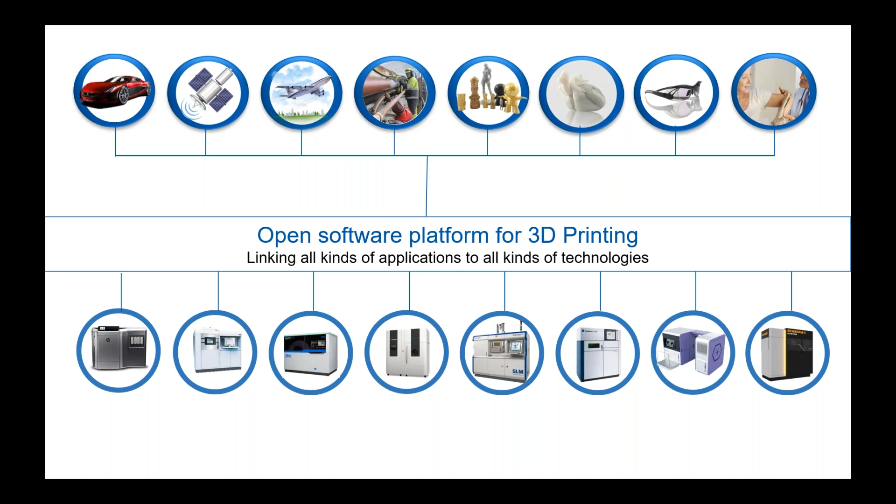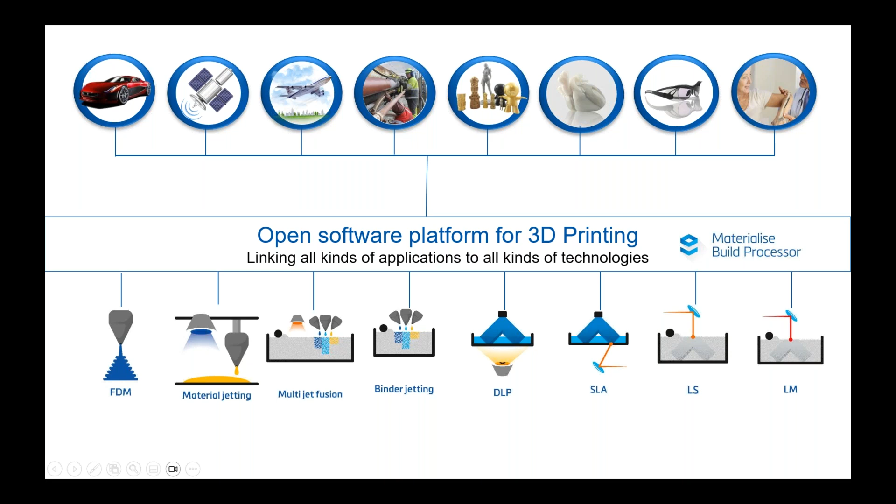So one of the goals of Materialise is our scope of handling every single additive manufacturing technology that there is. Some of the more obscure technologies we don't support as rigorously as the ones listed on the screen right here. And the ones we'll be talking about mostly today are laser sintering and DLP. A lot of these technologies shown on the screen have embedded functions inside of our softwares, but we also have a lot of additional modules that really help these specific technologies as well.

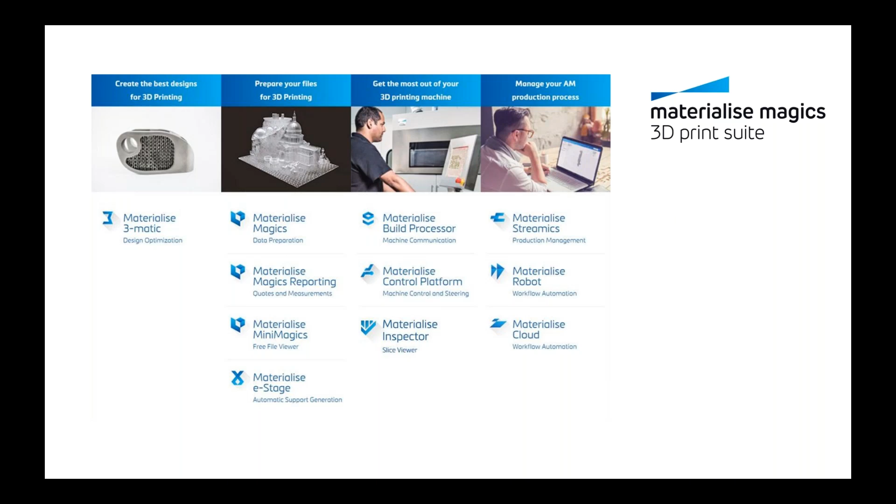So the main scope of Materialise, and one of our main goals, is to be the complete end-to-end workflow of your additive manufacturing process. It can start off with Materialise 3-matic. After you get your parts designed in your CAD program, you can put it into 3-matic. 3-matic isn't necessarily a CAD program, but it is a design optimization software, where you can make some pretty powerful edits to a part and things that really pertain to the additive manufacturing space. And if you've heard of Materialise, you probably think of Materialise Magics.

This is our most popular software. Our first iteration of Magics was developed in 1994, I believe. Magics 1 came out around then, and currently we're on Magics 27. So yeah, this is our bread and butter software.

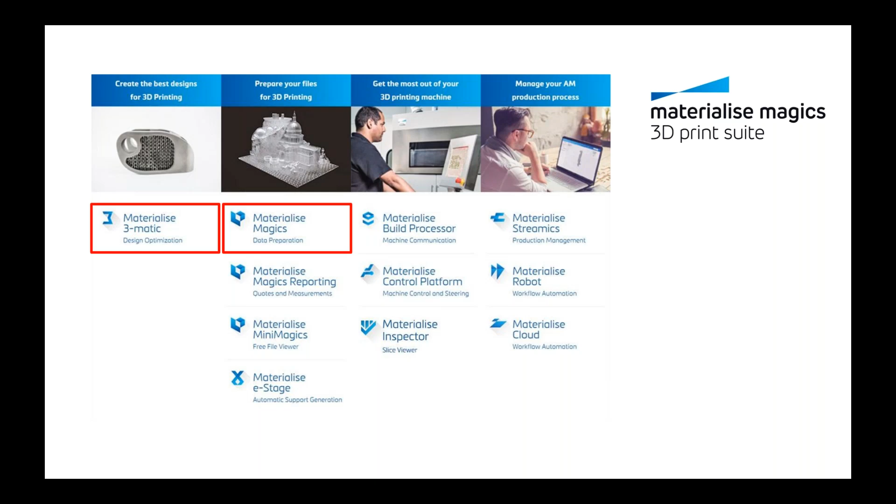You may have also heard of Materialise e-Stage. This is an automatic support generation software. We have a good use case for that in SLA processes and laser powder bed fusion for metal processes as well. And what I'll also be talking about today is the Materialise build processor. The build processor is just increased machine communication from software to machine, therefore increasing communication between person and machine.

And then on the right-hand side, you see Materialise Streamics, Robot, and Cloud. We also have our most comprehensive version of all of these put together, which is CO-AM. CO-AM will manage your entire 3D printing process. So when you receive your part from your customer, if you're a service bureau, or when you get your part designed, you can quote your part, see where your part is throughout your workflow, manage all your machines, have everything scheduled, and be able to keep track of your parts as best as possible, just to make sure everything is accounted for.

And on top of that, it is a cloud-based software, and this software can be held on your own private cloud or Materialise's cloud as well.

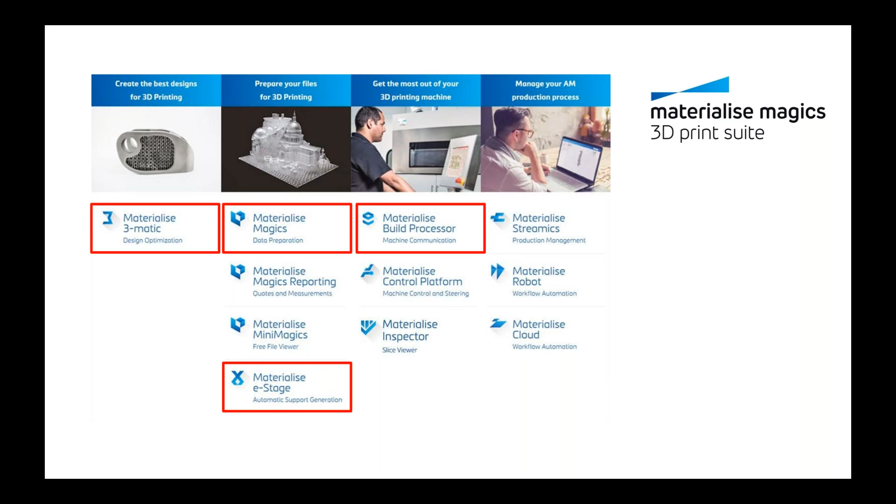So starting off with 3-matic. As I mentioned before, 3-matic is a design optimization software. There are modules within 3-matic, but today I'm just going to be talking about the base module. The base module of 3-matic has the Lattice module and the texturing module.

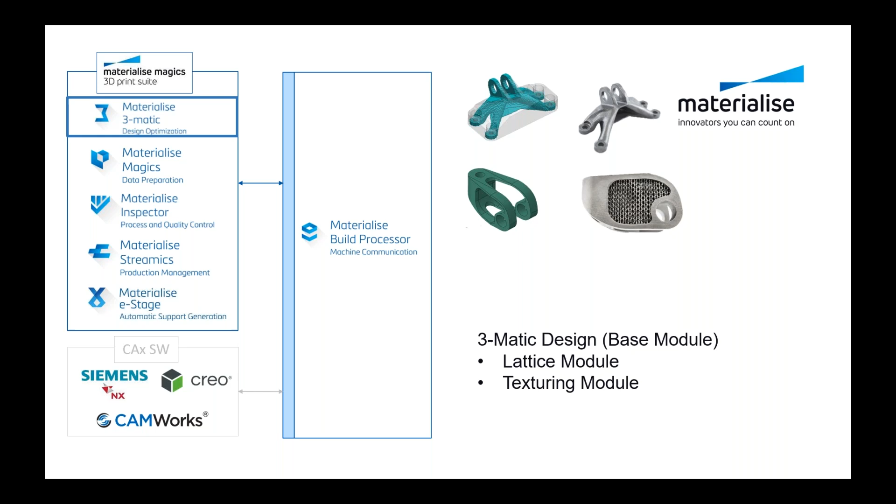So lattices, what are they used for? I'm sure a lot of you guys are really familiar with lattices and their use cases, and maybe some of you have deployed lattices yourself for any of these functions. So we will just roughly go through them.

Regularity of lattice structures provides great controllability. Properties of these porous structures can be fine-tuned to a particular functionality and performance. On the left-hand side, this is what we see the majority of users use lattice structures for within additive manufacturing, and even outside of it, for general use cases - really great for lightweighting structures.

Materialise has a really big hand in the medical field - things like hip replacements, shoulder replacements, cranial implants, knee implants, things along those lines. Lattice structures come in handy a lot, and I'll talk a little bit about that down the road.

There's also vibration control, things involving packaging like shock absorption, everything involving heat, especially heat exchanging, thermal insulation, and acting as a heat sink. It can also aid in increasing buoyancy, aiding in filtration, acoustic absorption, hinges, and support structures to infill in the additive manufacturing process.

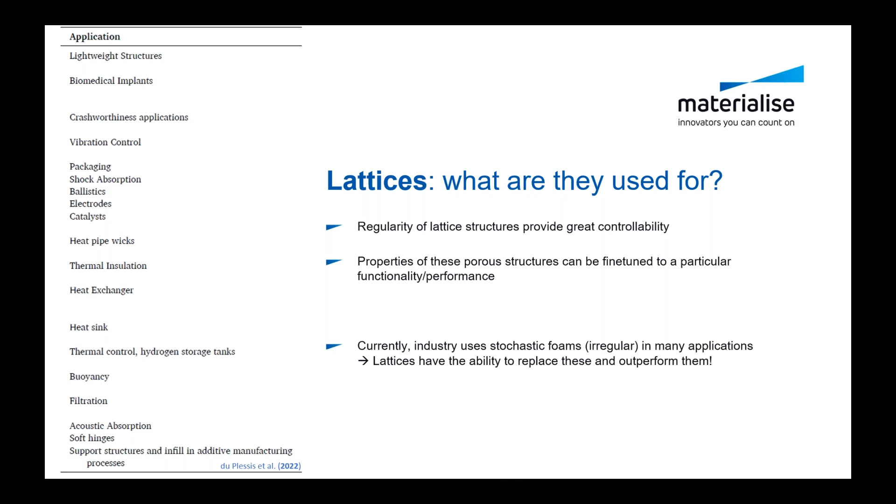You can make these change in size by using the uniform or user-based, porosity-based, linear gradient, texture and image-based, or my favorite, FEA-based methods.

The FEA-based method is really cool because you can actually import your FEA results into 3matic, and 3matic will take those results and then develop its own lattice structure and its own thicknesses to conform to your results, just to make sure that your lattice structure keeps its structural integrity and does what the FEA results outputted.

Another really cool thing about 3matic is you can design your own unit cells for the lattice structure. This is a really intuitive method of making your lattice structure, and just allows for greater customization when creating your lattice structure.

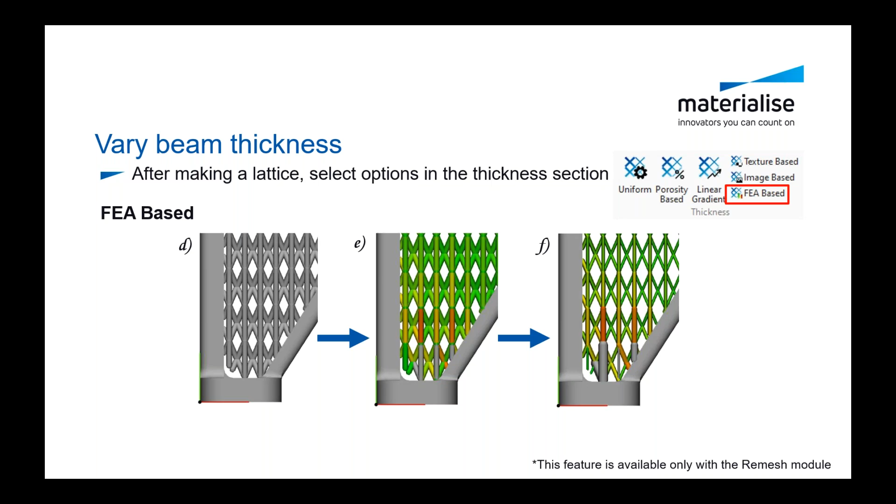The way that 3matic will place your lattice structure onto your part is through UV-based conformal mapping. So you can put it either on one surface or between two surfaces.

An application for the one-surface method is to add texture to the part that will promote bone growth on an implant. Earlier I talked about our involvement in the medical field and how we'll use the lattice structure in hip implants so that your bone will actually grow into the non-toxic hip implant, and it will basically become part of your hip, which is crazy to me, but super cool that your body will do that.

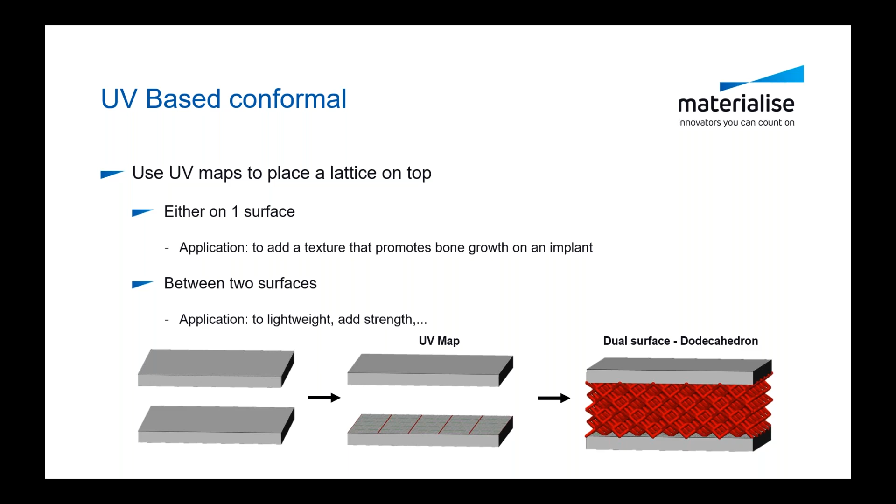And you can also put them between two surfaces. Again, as we talked about before, this can be used for lightweighting, adding strength, aiding in heat dissipation, acting as a heat exchanger, etc.

This is a case study that we did with one of our customers. They are in the aerospace field, and how they use the lattice structure is they put the lattice structure inside of their airplane wings. And this did a few things.

It not only made the airplane wing lighter by replacing the layered material with unit cells and channels, but it also helped in the de-icing process by taking the hot air from the engine compressor and dispersing it throughout the wing, aiding in the de-icing process.

So the flaps that some of these airplanes have when de-icing have to work a lot less, therefore working much more efficiently during the de-icing process itself.

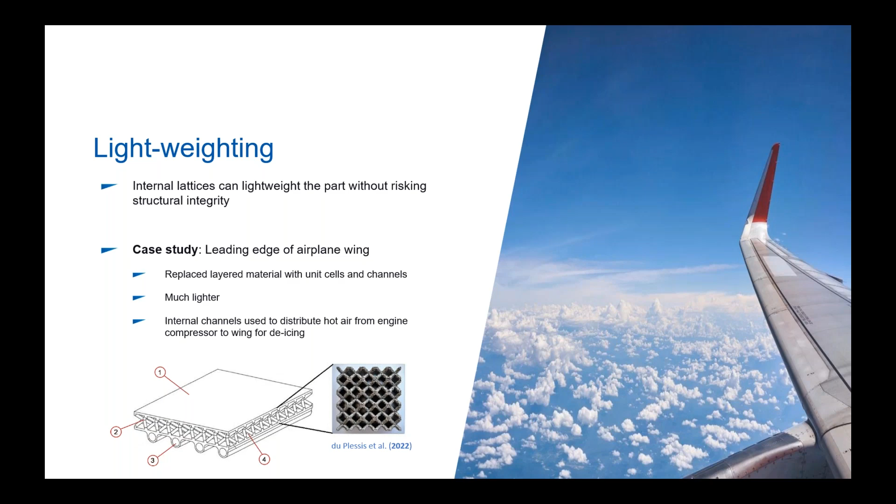And now texturing. So again, very similar to latticing, I'm sure a lot of you guys are really familiar with texturing and maybe the use cases. But I'll just go over briefly what some of the cases are that we see.

Aesthetic textures - you can add some personalization, whether that be for personal or company use. Surface decoration with organic or design patterns. You can also add some organic effect - this can be useful if you're in the medical field, or if you want to slightly change the texture of the part just to make it more useful in your use case. It can also have a blurred layering effect of the 3D printing.

Functional textures. We see a lot of grip, a lot of acoustics, which is really, really interesting to me. That was one of my favorite projects I was able to work on.

Textures can help with reducing reflection, aiding in aerodynamics by making streamlines, aiding in cushioning, increasing filtration, and increasing reinforcement of a part. And then there's texturing on a prototype, which is really interesting as well.

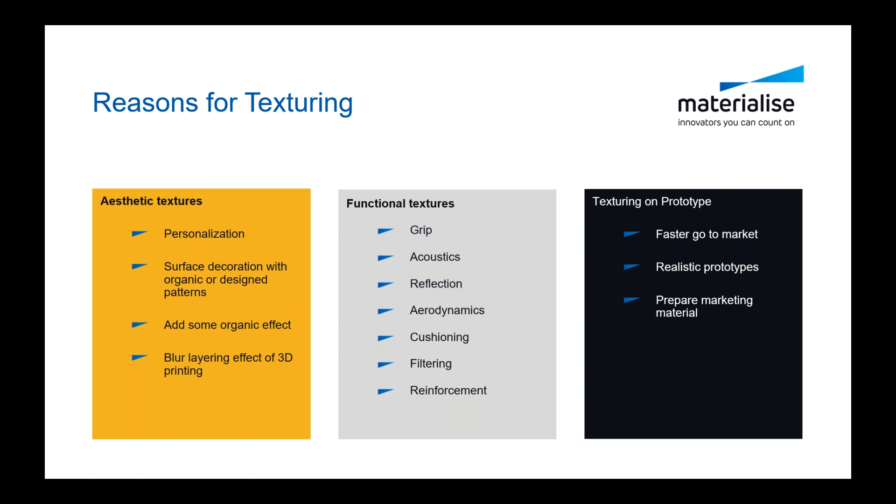Prototyping is a really common thing in the additive manufacturing industry, and that lead time of getting a prototype to market, or at least getting it ready to be showcased, can be a really long time. Adding these textures can make it look really finished, giving it that final product look, and will reduce that prototyping time down pretty significantly.

UV parameterization and surface mapping work very similar to how the lattice structure works. 3matic will put its texture on a part using the UV parameter set. As you can see in the image displayed, the image on the right was not using UV parameterization, and all of these curves in the part can be really cumbersome when putting a texture on a part.

On an edge, the texture can look really stretched out, or on a concave surface, it'll look really squeezed together. 3matic does a really good job taking that into account and understanding the geometry you're working with, to make sure that's eliminated. As you can see in the middle image, this is a really nice looking part where everything looks really uniform, even around the curves, staying as consistent as possible.

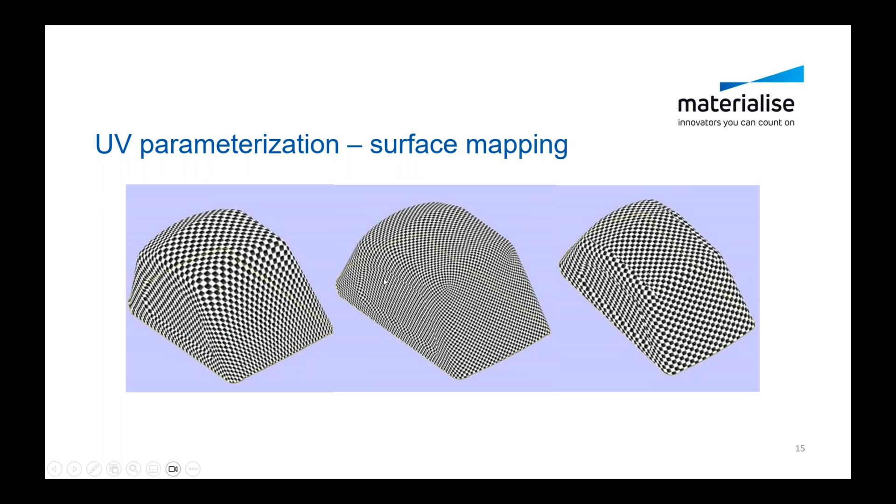The way that 3matic takes its textures is from bitmaps. These are some of the common ones we see. On the left is the top view, and on the right is its isometric 3-dimensional view. Some common ones we see are egg crates, ribs, pins, leather, wood, and weaving.

Pins and ribs are really common ones that I see also. These are good for acoustic changes. Ribs are really great for structures, and weaving is a common one too. This can be useful if you're working with carbon fiber, since some people will actually print in carbon fiber, and weaving is really nice for that.

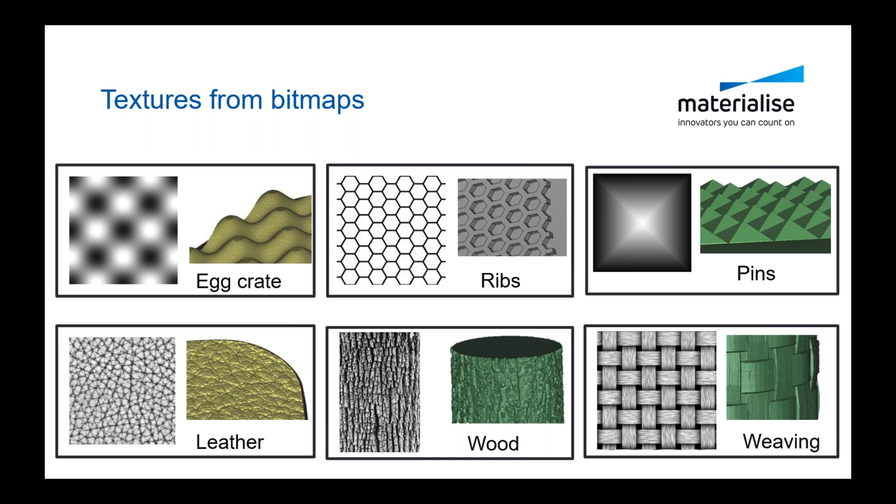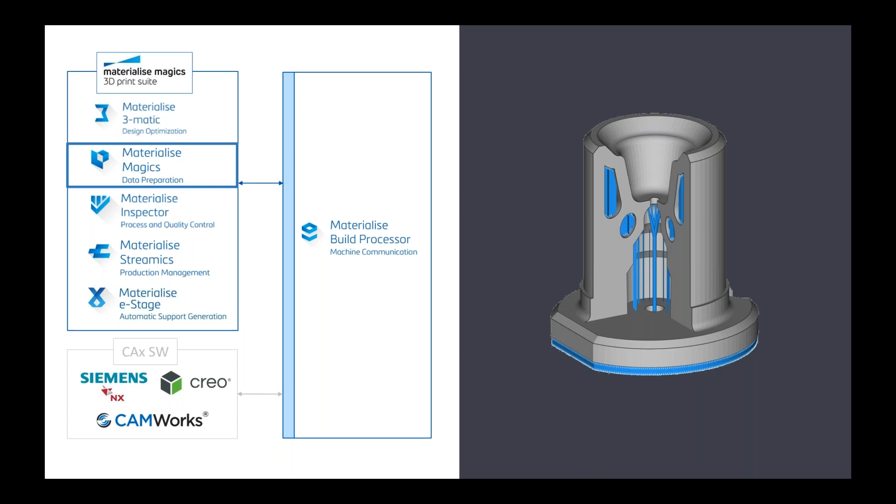Once you have everything designed and changed in 3matic, you'll put it into Materialise Magics, which is a separate software solely for data preparation. This includes getting your parts ready to be printed, supported if they need to be, and some last minute design changes if you want. These design changes are pretty remedial, and we'll get into that a little bit.

This is the workflow you'll go through when using Magics. You'll import the part into Magics, make sure it's properly defined, and if it is not, use the various tools in Magics to fix the part and make some basic edits, as I mentioned before. Then prepare it to be built, export it, and use the quality control functions as well.

This is something we've been working really hard on. You can make custom reports to get everything on a black and white sheet of paper. You can export 3D PDFs as well, and utilize the measurement functions within Magics to make sure that your final product matches what is displayed inside of Magics.

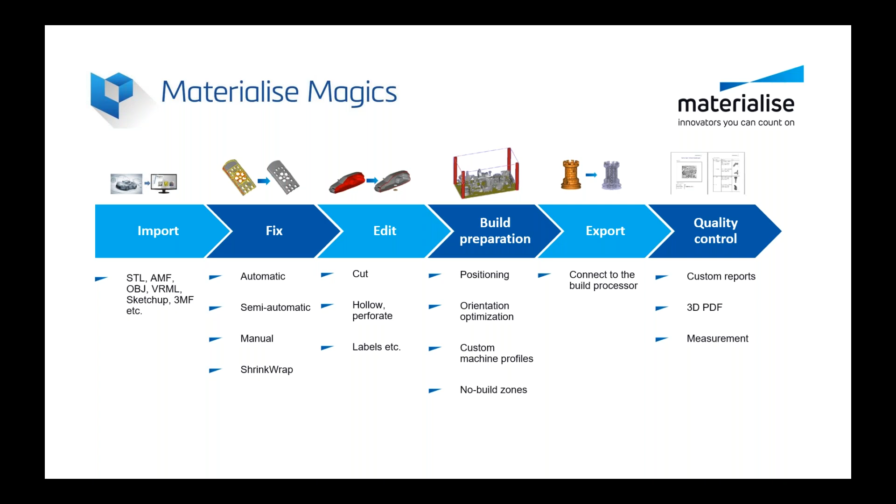Ever since Magics 26, released in May of 2022, and subsequent versions, you are able to import any type of CAD file. Previously, users had to, and I'm sure some of you have had to go through this, if you're using SolidWorks, CATIA, or Autodesk Inventor, convert the 3D file into an STL file and then import it into Magics. Now you can just import the CATIA part, the OBJ part, or the SolidWorks part directly into Magics, and control the part in its native CAD format or its BREP format.

Once you have it imported as its CAD format, you can transfer it into an STL file inside of Magics. Magics is very, very good at interpreting STL files and creating STL files for that matter, and you have full control over creating your STL files. You can manage the part resolution, determine how you want Magics to interpret the way the triangles are defined, and save all these settings as profiles to make sure it's consistent throughout your entire use of the software.

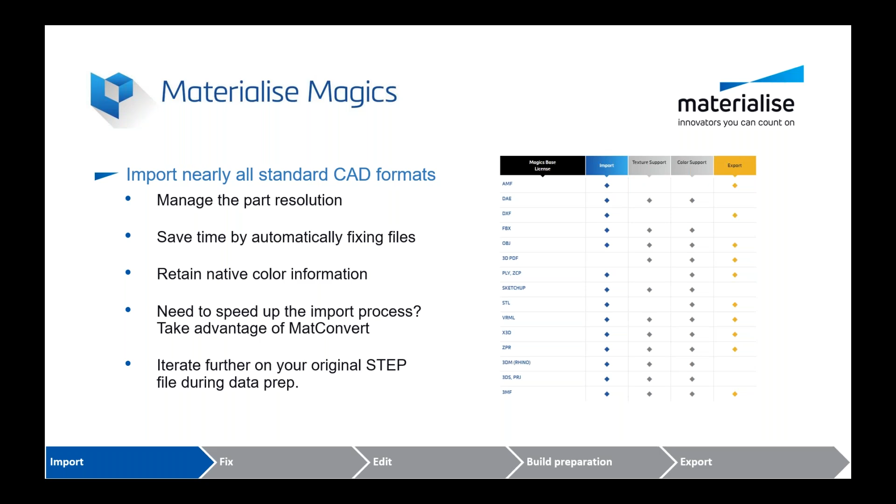This import function will also retain native color information. Magics has been really useful in terms of fixing files ever since its release in 1994, and some people just use Magics for the fixing files.

If any of you are familiar with additive manufacturing and have had to do this, you understand how annoying it is when you get a part and maybe you're missing some triangles, or maybe you have inverted triangles, or some triangles have bugged out and are attached to triangles they shouldn't be.

This combines really well with the import functionality of the newest versions of Magics software, because 3D softwares will interpret STL files differently. SolidWorks interprets an STL file a little differently than how Autodesk Inventor interprets it, and when a single STL file goes through all these different softwares, the files can get all messed up and not be properly defined.

So Magics has a few very powerful tools for fixing a part file. There's an automatic function, a semi-automatic function, and a manual fixing function that will allow you to repair really complex models and difficult issues that might otherwise mean you have to scrap the part or get a completely new model. You can do a lot of fixing just within Magics, and like I said before, a lot of people have Magics just for the file fixing functions.

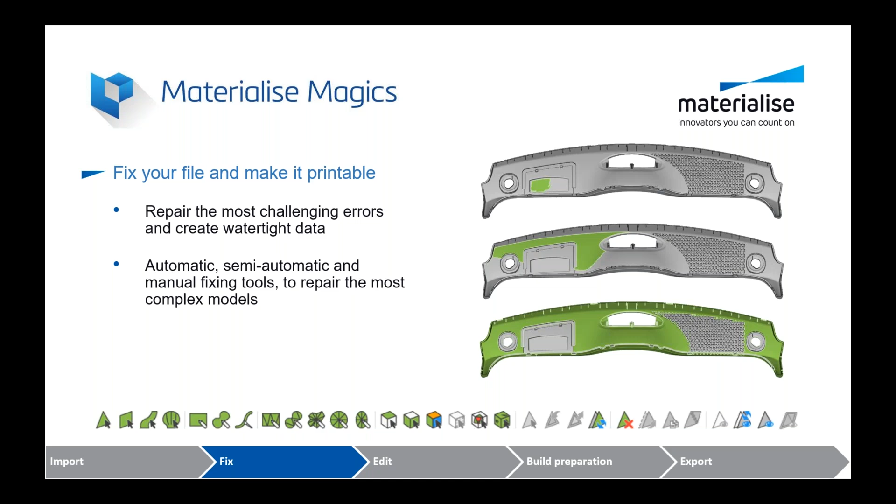Once you have your part fixed and are getting ready to build it, and you want to make some slight changes, similar to the 3-matic software, Magics has something called the structures module, which is also a latticing module. However, it's not quite as robust as 3-matic.

It's a latticing module, so it's really great for lightweighting a structure while keeping structural integrity. It's really good for being used as a heat sink, and it can increase part quality when using the 3D printing process.

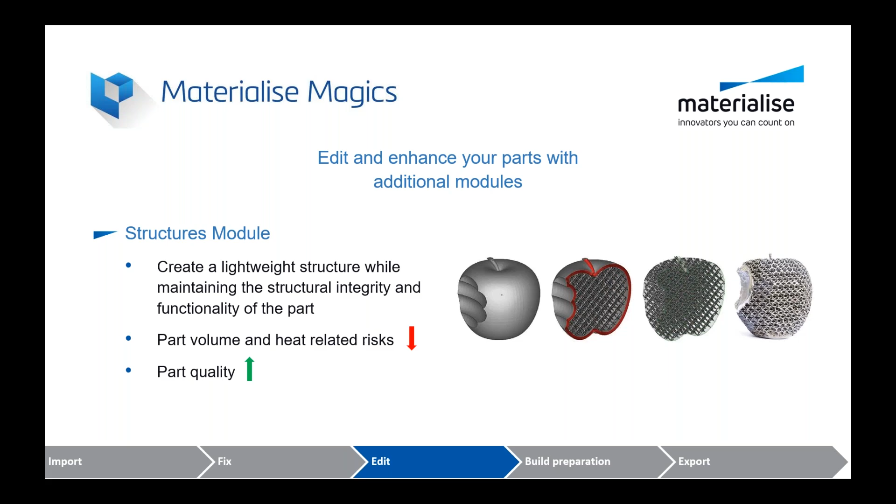Another really useful thing with Magics is the prop generation, which aids in temporarily providing supports to a part. If you see the image on the right, there are these thin-walled areas, and if you're going to 3D print this part, these thin-walled areas can sometimes tend to shrink inwards. You can use the prop generation to hold those parts or walls where they need to be so that they do not shrink inside.

You can also see the measurements you can change with these prop generation tools, and you can make them very easy to break off or make them quite robust. Another really cool thing is you can combine this prop generation tool with the structures module. I've seen people actually lattice this generated prop, or support structure, to aid in even easier part removal or more material saving.

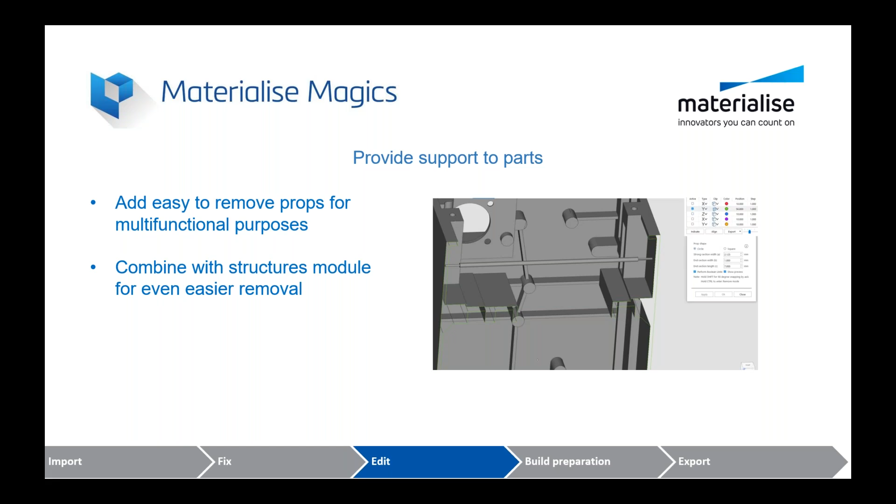You can also label and mass label parts. Labeling in Magics is very simple. As shown in the image, you just select the label function, draw a rectangle where you want the label to be, and then type in what you want the label to say. You can make this either embossed or engraved. You can add a drawing to it, use a projection view, maybe if it's not a flat shape, and you can also use a data matrix.

The data matrix is cool because you can not only import your company logo using a .dxf file, but you'll also be able to mass label parts using it. Say you're printing 100 parts at a time and want to serialize them. You can make an Excel spreadsheet that will mass label the entire build volume, and Magics will understand the pattern on that spreadsheet and use it to project labels onto every single part.

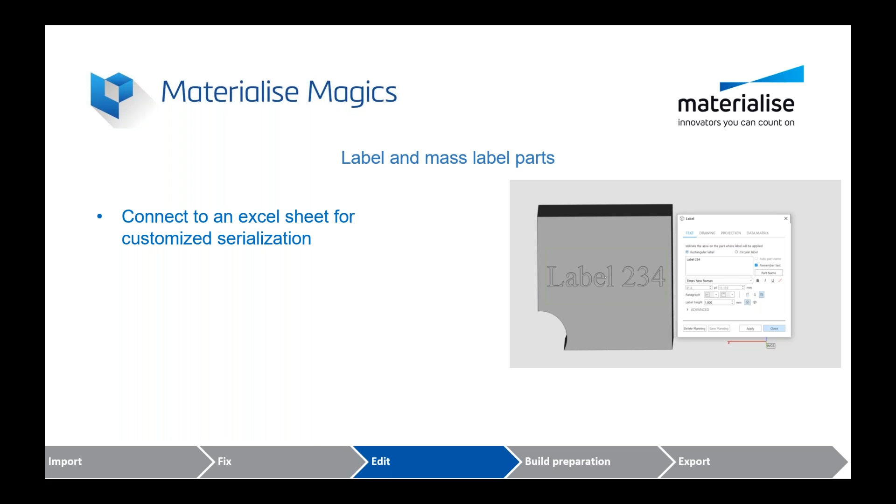Next, we have our Nester tool. This is another one of our more popular modules within Magics. If any of you guys have used laser sintering, you understand how annoying it can be to nest these parts. It can sometimes take hours, especially if you're using geometries like what's shown right here.

There's a bunch of different things going on - a bunch of shapes, a lot of thin walled parts, really skinny parts. These can be really annoying to orientate and put inside of a build volume. So the Nester tool will be able to detect out of bounds, have collision detecting, see interlocking parts, evaluate your wall thickness, see trapped volumes, and do a build risk analysis.

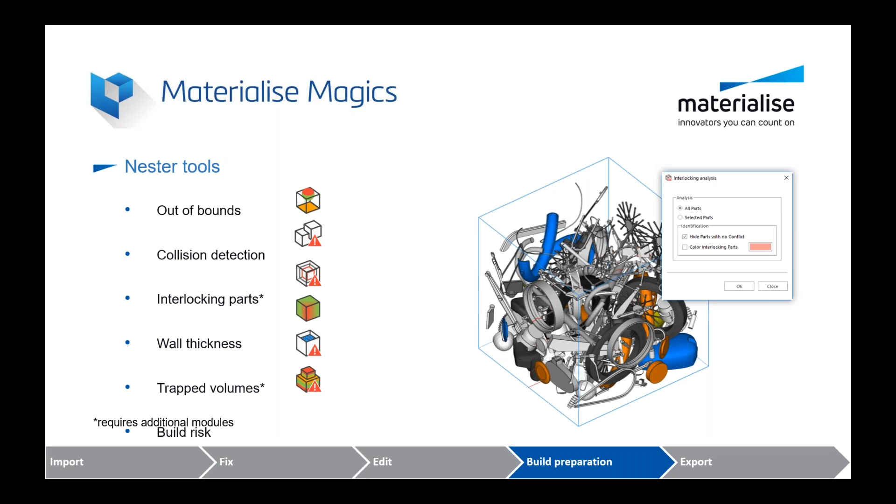And the build risk analysis is an empirical function, so you will need to run the build risk analysis a few times just so Magics can learn about what's going on, and then it will be able to foresee some failures that may happen.

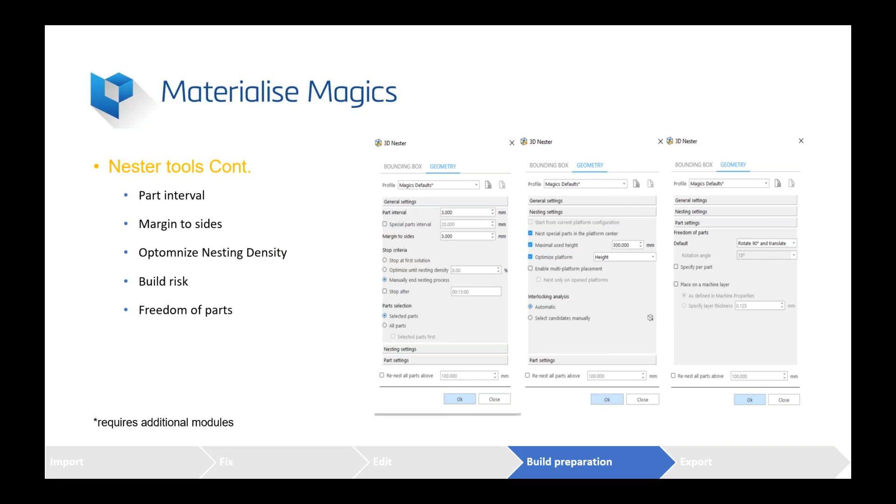Additionally, with the 3D Nester tool, we have the sub nester and sinter box. A lot of things that I have experienced and that I have seen other customers or users experience as well when printing small parts with larger parts is when you're trying to extract the powder, or when you're trying to take the parts off from the cake. Sometimes, if you're vacuuming up the powder, you might inhale some of these smaller parts. And what the sub nester does is it will group up these small parts and put them into a little subgroup, hence sub nester, and it will place it somewhere inside the build volume. This is all user defined.

And what you can also do with that is you can put a sinter box around it. This will protect those small parts and prevent you from losing any of these little tiny parts or accidentally sucking them up inside of a vacuum or something like that. And you have complete customization of this sinter box as well - you can make it into a square, a circle, define the shape, or make it into a triangle if you wanted. But you can change the size of the sinter box as well, if you want to save some material or anything along those lines, while also keeping the function of the sinter box.

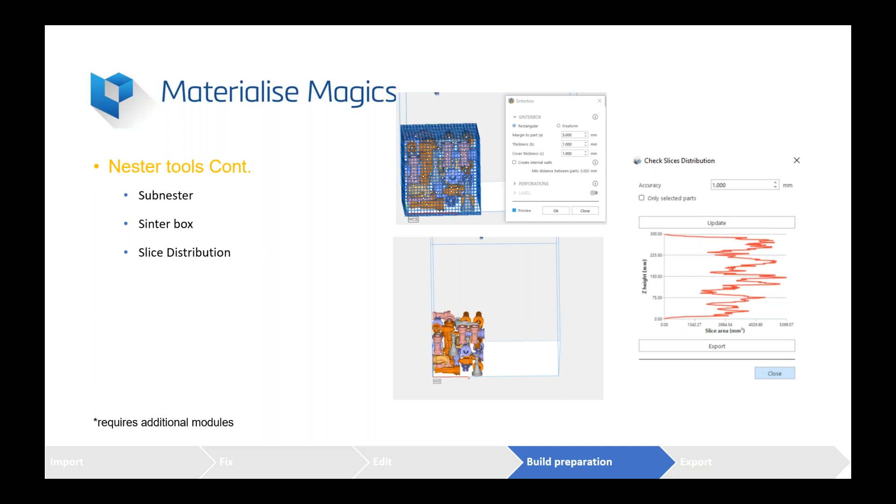Another thing that you have is something called slice distribution. You'll be able to check the slice distribution of your build volume just to make sure the cross section of the build volume is as consistent as possible. If you can see the image on the right, this one's pretty good, but it's a little all over the place. It will give you a good idea of what the slice distribution looks like with respect to the Z height. Ideally, you would like this to just be a straight line, then you would have a completely consistent XY cross section throughout the entire build volume. But this is just another tool that you're given to evaluate your build prep and evaluate your build volume to make sure it's as best as it can be.

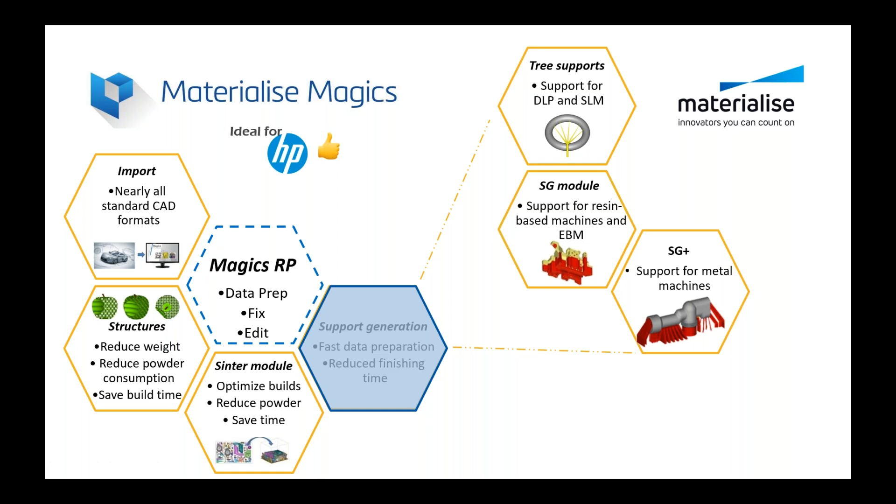Next, we have our Materialise build processor. Once you have your part fixed, edited, and build prepped and placed into the build volume, you then have to actually send it to the printer. Right now it can be a little difficult getting it there. The common workflow is exporting it to a thumb drive, walking over to your printer, and plugging it in—that's how you get it to your printer.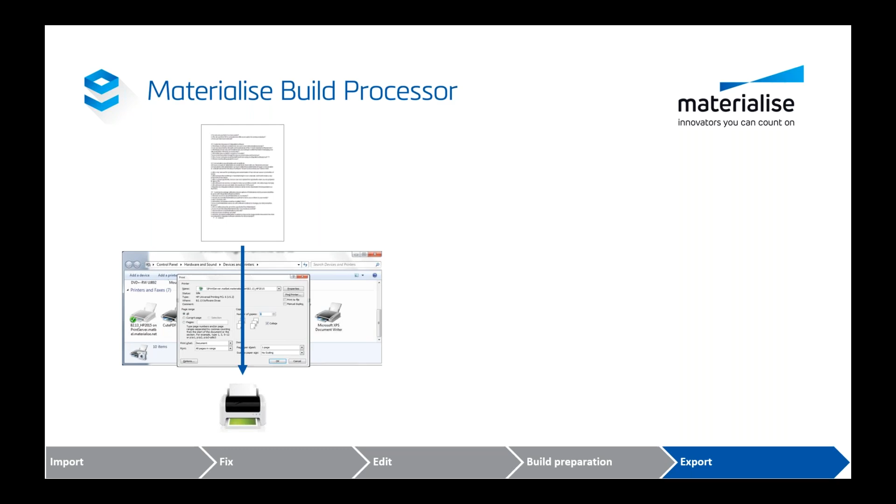It would be really nice if it was like printing a 2D piece of paper—if you just have something in a Word document, press print, select your printer, choose your settings, and it gets printed. The build processor does just that. We've partnered with many different OEMs, and it's basically that exact same interface where you build through the build processor. So this is what it looks like.

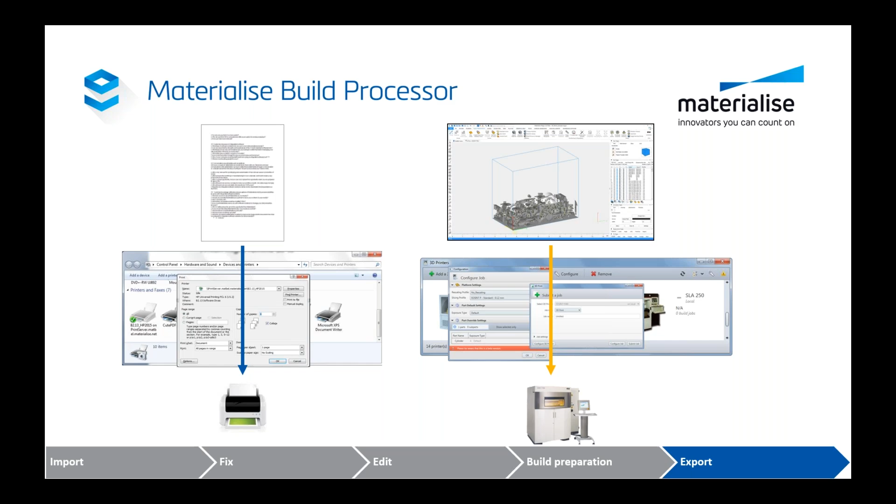You'll select the machine you want it printed on, select the settings you want to change, maybe change the profile if it's a different material, or depending on the machine it's running on, you can change all these things. Then it will be sent directly to the 3D printer itself, and you won't have to manually put it onto a thumb drive, walk over to the printer, and plug it in.

So this is just another look at our build processor and how that workflow looks, and how quick it can be—even using the HP 3D Build Manager.

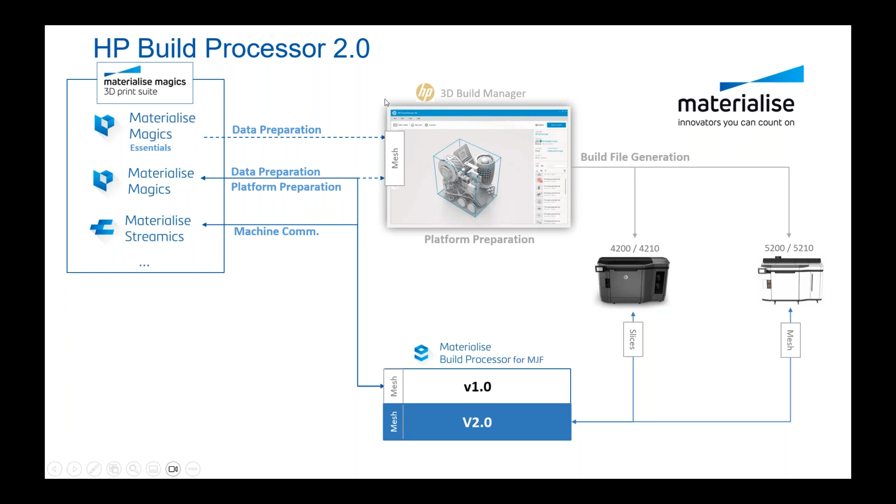Next, I want to go over the types of licenses we have. Licenses can either be bought perpetually, so you buy it once and it's yours forever, or some modules are annual, which is basically a leased license—you buy it once, use it for a year, and once the year's up, you buy it again and use it for another year.

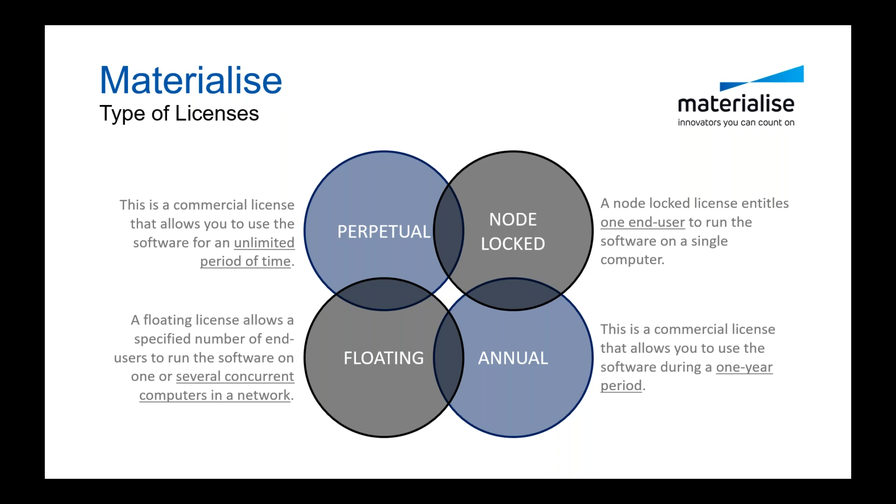The way licenses reside on your computers and how they're used is either node-locked or floating. Node-locked licenses are tied to one computer at a time, and floating licenses work on a server—if you host the license on a server with 2 floating connections, then 2 people can use it at a time. With 4 floating connections, 4 people can use it, and so on. What's great about the floating license is you can have 20 people with Magics on their computer, and they can all access the license, just not at the same time.

So just a quick summary: we talked about the 3-matic software and its latticing and texturing capabilities. We briefly went over the Magics software, its importing functionalities, file fixing, structures module, its Sinter module or 3D nester as it's commonly referred to, its build processor, and the types of licenses that Magics, or the Materialise software, runs on.

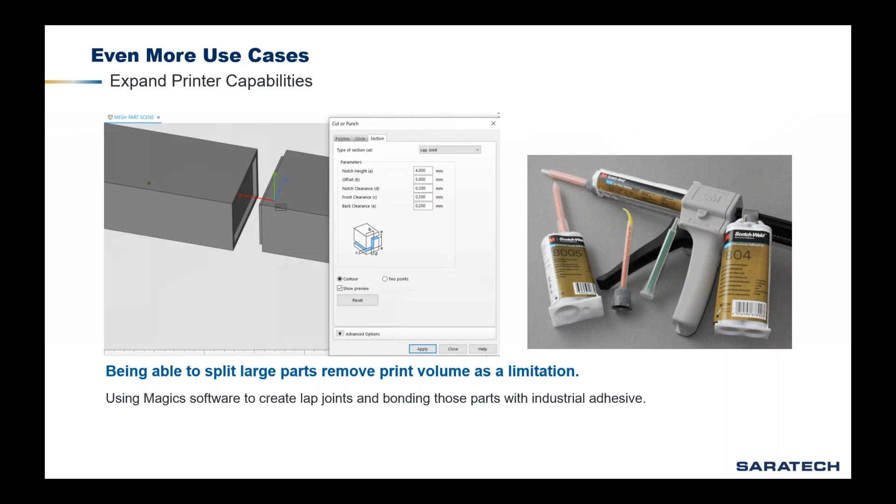There's lots of different levels of design for additive manufacturing, or DFAM as we call it. Starting off, you can take a part that's designed for traditional manufacturing methods, and it may be perfectly fine to print without a redesign. You just may need to do a simple part evaluation and see if you need to reorient the part and what material you may want to select for that.

At other times, you can take an assembly of parts and just simply merge them into a single part to reduce your part count and complexity. That works from time to time. But if you really want to take advantage of 3D printing technologies, you will want to design your part from the ground up, or if you have an existing part, redesign it with DFAM, with additive manufacturing in mind.

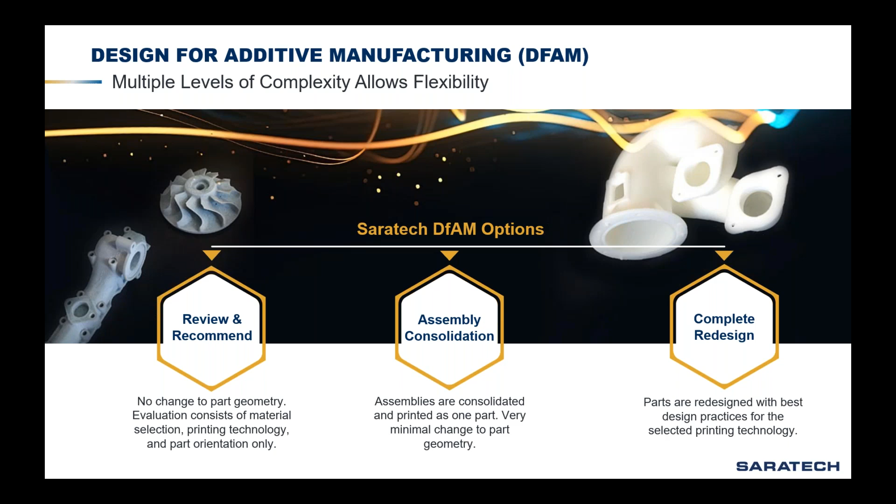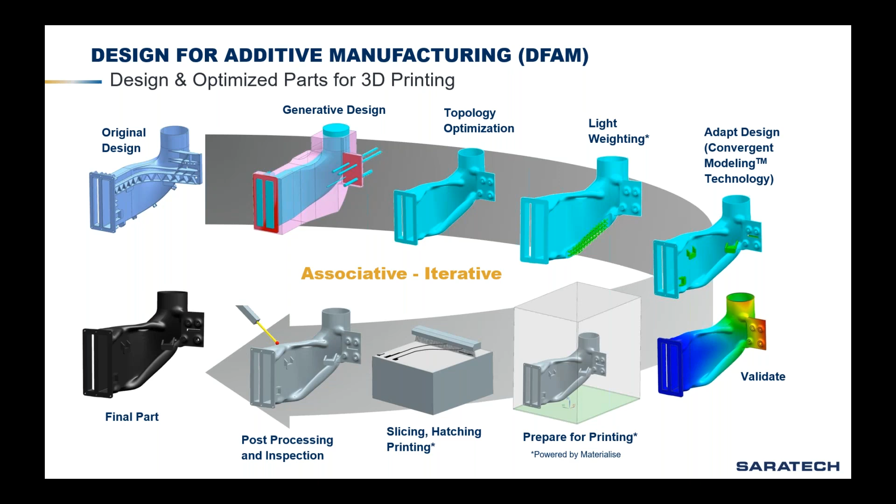And at Saratech, we have lots of tools to help engineer parts for additive manufacturing processes. We leverage all sorts of technologies such as generative design and topology optimization, as well as lightweighting and using lattice structures. And Materialise is a very important part of that process for us. We use it quite a bit as well.

And at Saratech, we want to help customers adopt additive manufacturing solutions. At its core, Saratech is a product development company, and we want to help our customers make better products. And additive manufacturing is just one of the ways we achieve that. It is able to reduce costs and lead times, as well as give you better design freedom, which ultimately leads to better products.

Materialise software is an important tool in our toolbox, and that enables customers to have greater success with additive manufacturing. We also have many services that can help you adopt these new technologies. We offer things like prototype development, process development, and training. We do hardware sales, as well as design to print services for our customers.

We see additive manufacturing as the next big shift in the manufacturing space, and it's our goal to help customers lead the way with it.

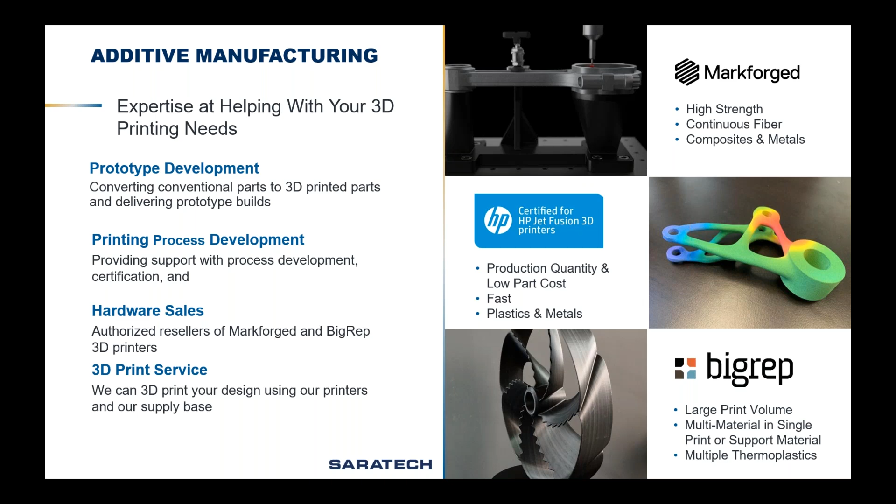We engage with our customers to find the right solution for their business. This entails usually a discovery call or a site visit where we learn from you what you're trying to achieve with additive manufacturing. Next, we look at your current processes to see where there are opportunities for improvements. And then we will review potential solutions and the benefits to your business.

Once we implement the solution, we want to continue to work with you to repeat that success so that you can keep using additive manufacturing and make your business better. We're excited to work with you on your next project, so please reach out to us.